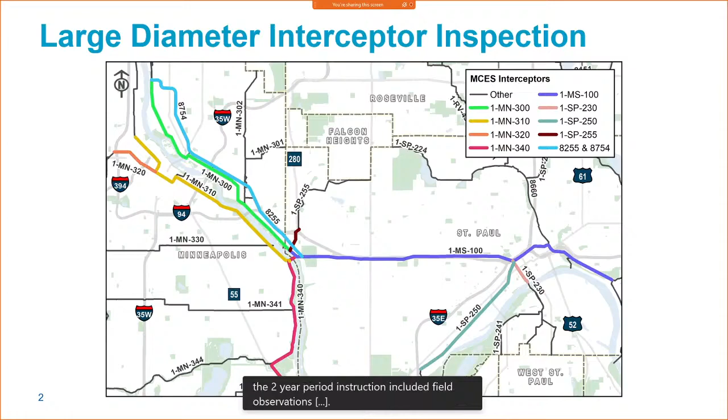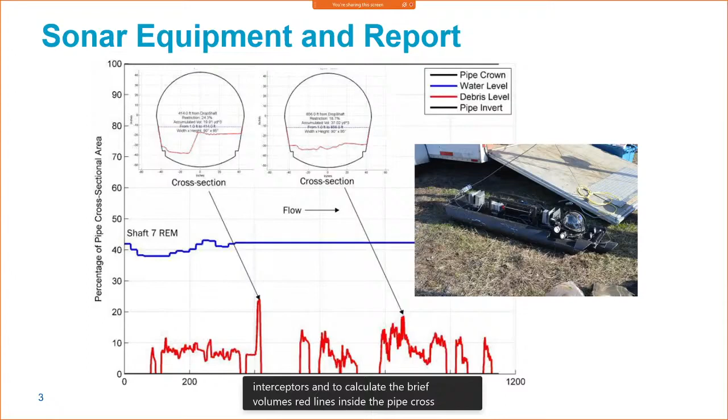The equipment platform floated down the interceptors to conduct the closed circuit televising and collect sonar data as shown on the right. Televising records were used to assess the conditions of the pipes. Sonar data was graphed to show debris depths and wastewater flow levels in the interceptors and to calculate debris volumes. The red lines inside the pipe cross sections on the graph show debris levels, and the blue lines show wastewater flow levels.

The pipe segments to be cleaned under the current contract are shown here. There are about 2.5 miles of pipe between 6 sites on 4 different interceptors.

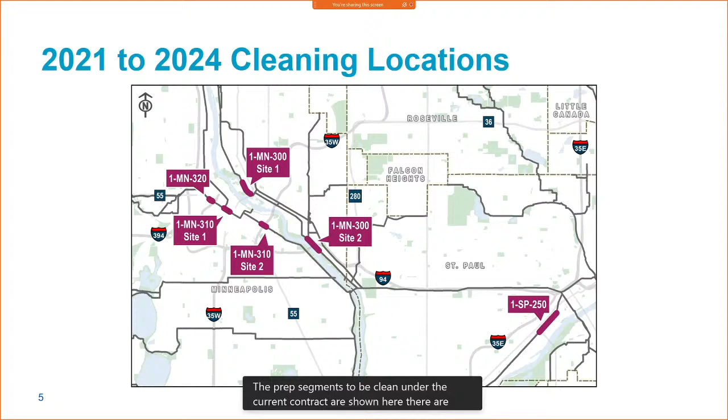The bid results were as follows. There were 2 contractors pre-qualified to bid. 1 pre-qualified bid was received, and Deutsch Environmental Services was the lowest responsible bidder.

The proposed action is that the Metropolitan Council authorize its regional administrator to award and execute a contract for Phase 2 large diameter interceptor cleaning, Project 819016, Contract 21P000, to Deutsch Environmental Services for cleaning 12,500 feet of interceptor pipe in an amount not to exceed $11,955,680.

Thank you, Mr. Chair. At this time, I can answer any questions. And if any questions come up later, my contact information is listed here.

Chair Lindstrom. Chair, you are actually muted, I believe. Yes, I am. I am muted. Sorry about that. Councilmember Zirin. Thank you, Chair Lindstrom.

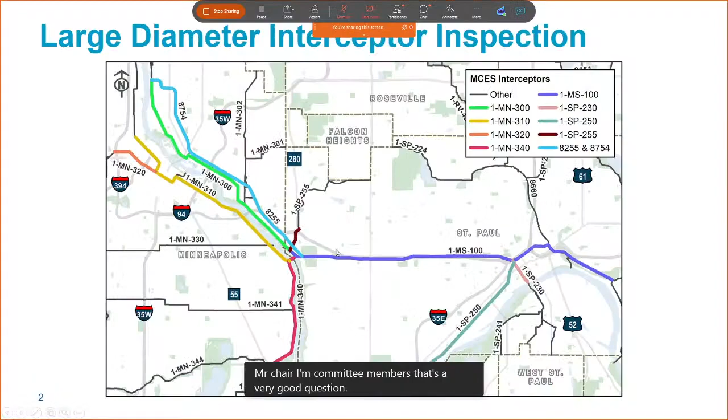Mr. Chair, committee members, that's a very good question. That's just an example of some of the stuff that's coming out of there. A lot of times there's broken castings, or there was a construction project that happened and things got washed down. There's stories of all kinds of large stuff going out. One of the troubles is you can't just pull that kind of thing out with a vacuum, so people do have to go in there and get that. I don't imagine a lot of that happens these days, but these pipes haven't been cleaned for some of them 100 years, so it is amazing what's in there.

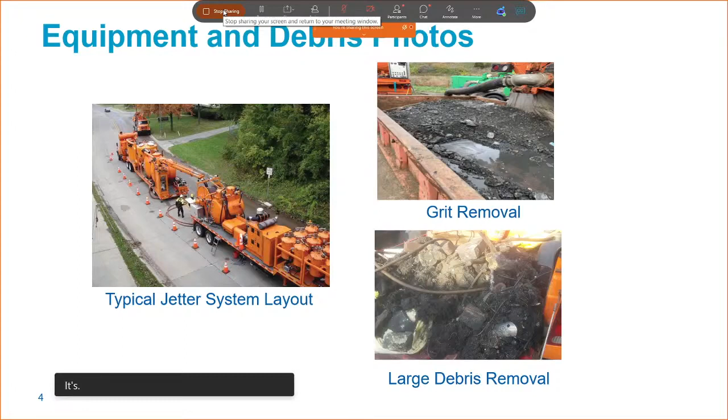You might find something from a crime scene from 1921. Very possibly. It's pretty fascinating that there's only 2 companies in the nation that do this type of work. I guess it's very specialized to climb down 110 feet in an active sewage tunnel or pipe and do this effectively, and have all the right equipment and know-how to make it happen.

Any other questions? Wolf moves, seeing none, approval. Thank you. Is there a second? Fredson will second. Roll call, please.

Fredson, aye. Sterner. Councilmember Sterner, you may need to vote in the chat. I will move on. Vento? Aye. Thank you, Councilmember Sterner. Wolf, aye. Zirin, aye. Lindstrom, aye. Thank you.

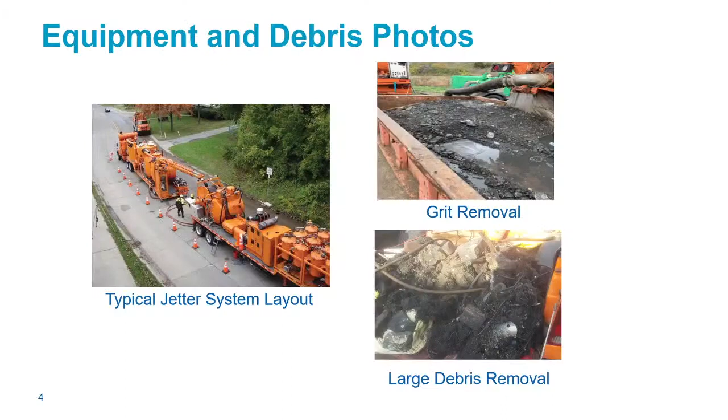Up next, we have acquisition of property for the Shakopee Interceptor odor improvements project. Thank you very much, Chair Lindstrom. Welcome, nice to be here. I want to present this business item tonight to discuss the acquisition of real property for Shakopee Interceptor odor improvements, project number 809510.

We have been in planning stages for the last year for an increase. What we've seen is an increase in odor complaints in the city of Shakopee, primarily due to new development starting to get closer and closer to our interceptor system. There are 2 areas in which we have observed odor issues. The first is at the end of a very long force main discharge from L57 that serves Chaska, and we get quite a bit of hydrogen sulfide generation from that force main, released right at the end of the green line.

There's a predominant east-west line shown in the graphic. The 9206-2 interceptor, shown in red, receives that flow, and we get quite a bit of release of hydrogen sulfide at that area. As the sewage flow moves across the city of Shakopee, it joins with interceptor 7120, which comes in from the south and heads north towards the Blue Lake Wastewater Treatment Plant. Right there, shown as odor area improvement number 2, is an area where we have basically 2 siphons, one that crosses a perennial stream and another that crosses the highway as the flow comes into the Blue Lake Wastewater Treatment Plant.

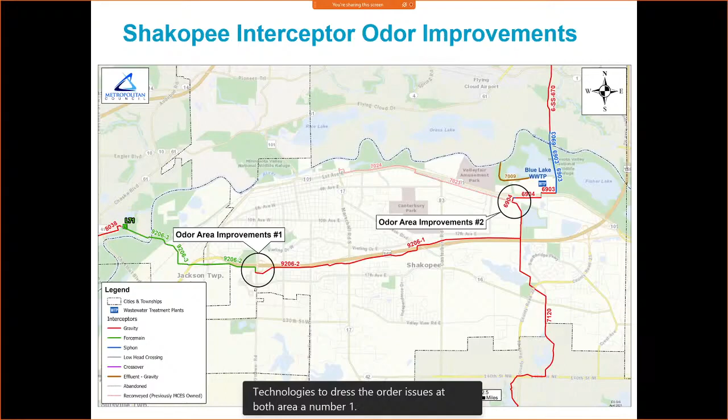Siphons are problematic in that they become an air dam to the air that's naturally ventilating down a sewer. So if you have an air dam, that air has to go somewhere, and it ends up being released right in that general location. So we've identified these two areas. We're heading into preliminary design, selecting technologies to address the odor issues at both area number 1 and area number 2. If we can go to the next slide.

At the location right ahead of the wastewater treatment plant, Blue Lake Wastewater Treatment Plant, we have a property at 6100 County Road 101 East. That is actually the location of one of the first siphons, that perennial stream I was talking about. This is about half a mile to the west of the wastewater treatment plant.

In 2017, we went through and had to replace pieces of pipe which were corroding, as well as replace the siphon structures that went underneath that perennial stream. We also did some lining of the interceptor to the west and to the east of there.

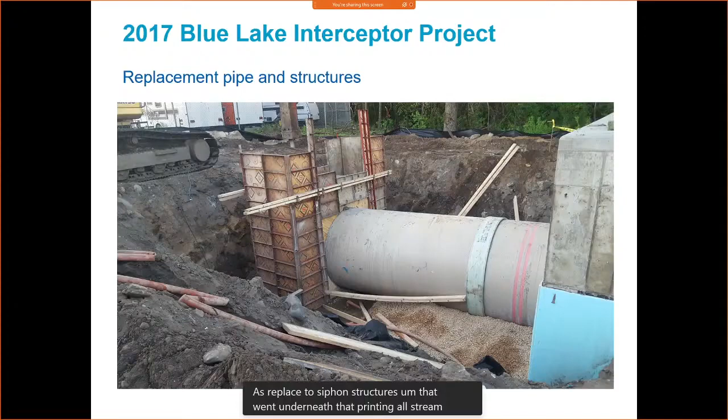If we go to the next picture, we'll actually see the siphons. We rebuilt the siphon that goes underneath the creek. I wanted to give you a little look at some of our construction pictures to see what our construction involves, at the property where the siphon is located.

Can I interrupt? I'm just curious, looking at this picture, what is actually the siphon?

The siphon is the 3 barrels. You see 2 of them have been constructed. They're constructed of ductile iron pipe, and they come out of the structure and duck down in grade and go under the creek. You don't see the creek really well in this picture because it's being pumped around through those 2 green pieces of PVC on the side.

You can see that's a little bit wet, it's always wet crossing a stream. Those pipes will actually come back up into another structure. We call that an inverted siphon - the flow will simply pass down and go underneath objects you can't cross or go through, like a stream or a highway, to get around those vertical features.

So, does that answer your question, Mr. Chair? Sure does. Thank you very much.

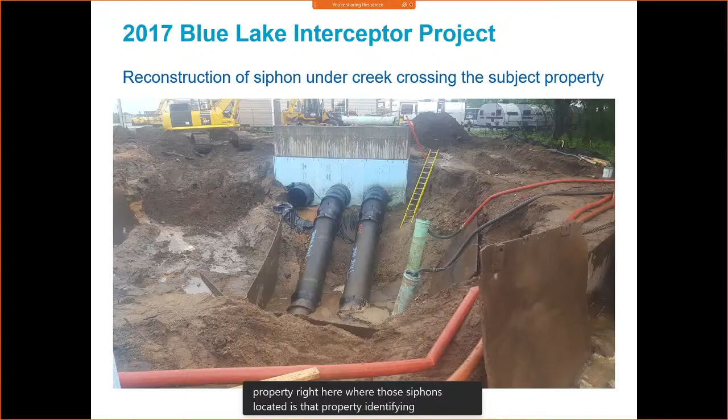At this very property where this siphon is located - is that property identified in the previous slide as 101 East, the 6100 County Road 101 East?

That property, we needed easements to do the work along there - the replacing of those pipe sections and the replacement of that siphon. So we acquired easements, temporary easements, through a condemnation. The condemnation is still outstanding on that piece of property.

So there was an interest in seeking to actually purchase the property, since it's not only ideal for us to locate new odor control facilities, but it would provide a final resolution to that condemnation.

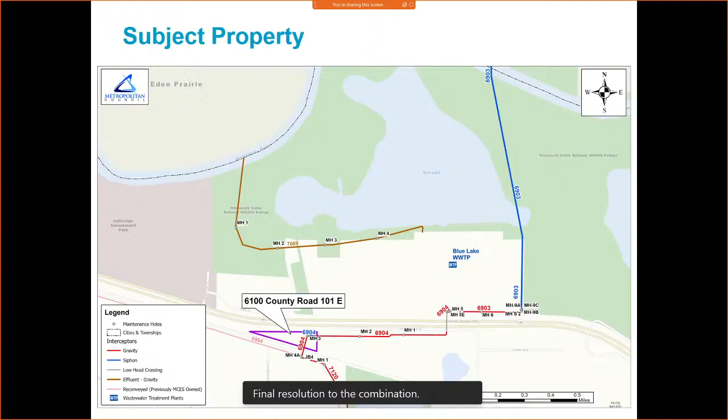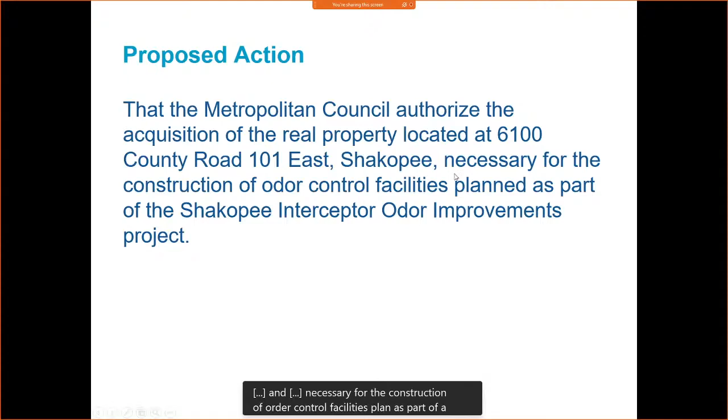With that, our proposed action is that the Metropolitan Council authorize the acquisition of the real property located at 6100 County Road 101 East in Shakopee, necessary for the construction of odor control facilities planned as part of the Shakopee Interceptor Odor Improvements Project. If you've got more questions, I'd be pleased to answer them.

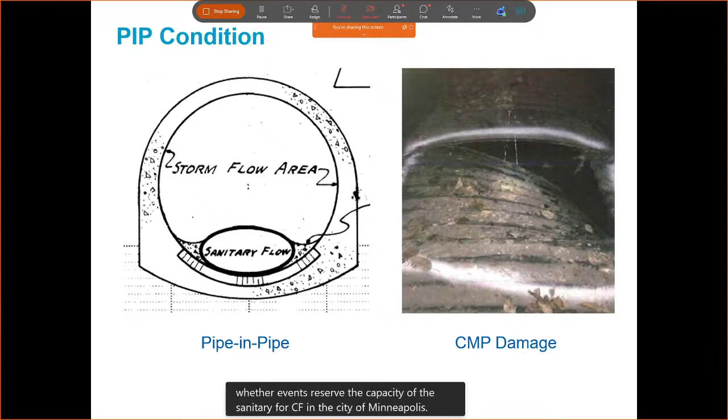Smoke testing of the corrugated metal pipe in November 2018 identified over 30 defects, including joint separations and holes. One of the more severely damaged areas of the pipe is shown on the right. The defects need repair to eliminate commingling of the storm and sanitary sewers during wet weather events and preserve the capacity of the sanitary sewer. MCES and the City of Minneapolis are currently conducting a joint study to address storm sewer capacity issues as well.

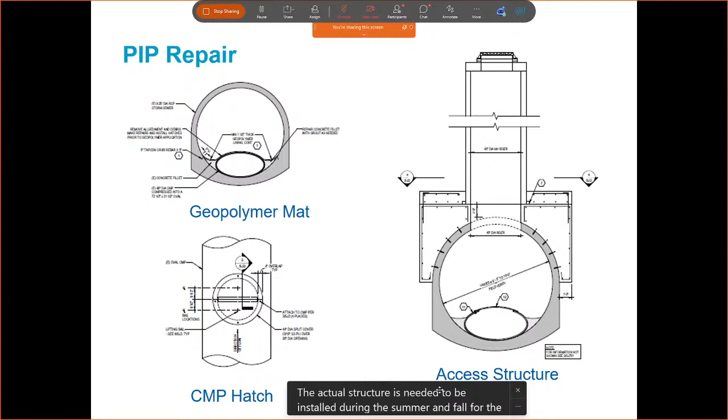There are 7 bids received, ranging from $6,508,850 to $11,195,893. PCI Roads was the lowest responsible bidder at $6,508,850.

The proposed action is that the Metropolitan Council authorize its regional administrator to award and execute a contract for Interceptor 1MN341 Pipe-in-Pipe Rehabilitation Project 807618, Contract 21P064, to PCI Roads LLC to install 13 maintenance holes and rehabilitate 8,200 feet of pipe-in-pipe interceptor in an amount not to exceed $6,508,850.

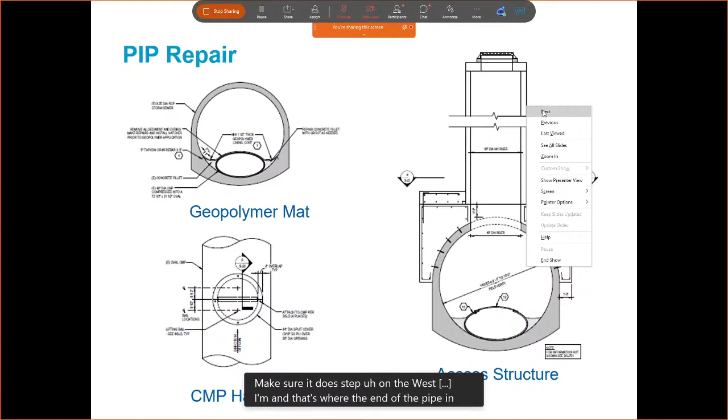No, it does, Mr. Chair. It does stop on the west side of Hiawatha, and that's where the end of the pipe-in-pipe installation is at. So everything upstream of that is just a straight sanitary sewer pipe. So yes, we're at 25th Avenue there.

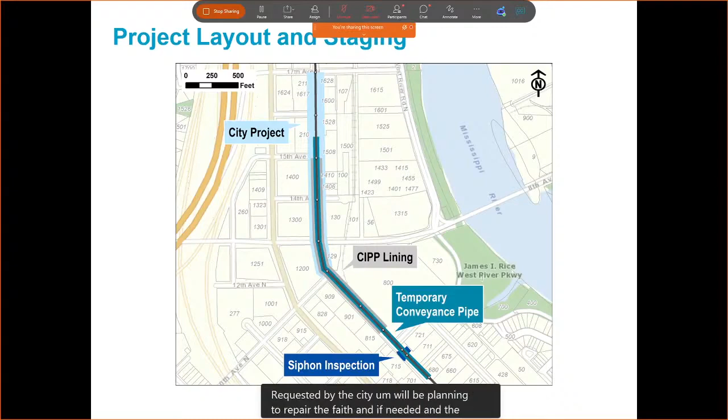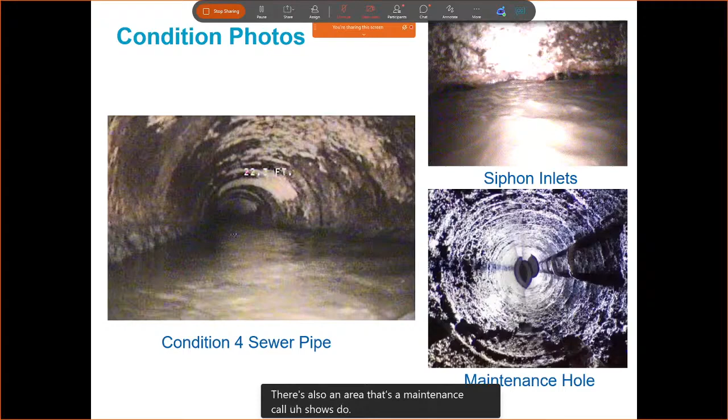These photos show the condition 4 deterioration in the sewer pipe on the left, and the siphon inlet structure on the top right, where you can see just the top of the gratings of the pipe. So, like going back to Adam's photos where they had the pipe going down into the ground, that's exactly what we've got here. The box fills up to the top of those pipes and then pushes it down to the next structure, so that needs to be dewatered for inspection. On the bottom right is also a maintenance hole that shows deterioration. A lot of those are brick and the mortar's missing on them.

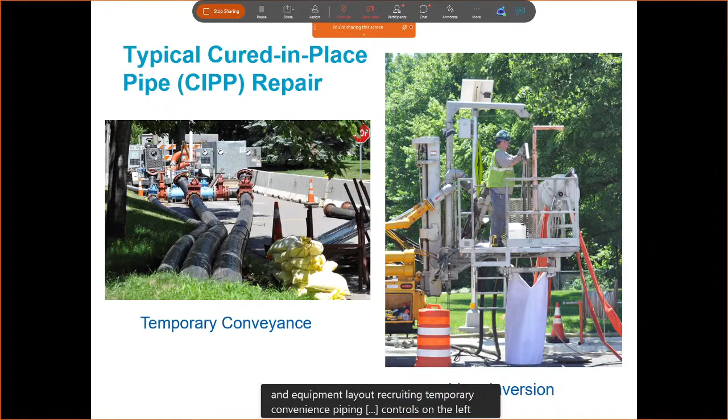These photos show typical cured-in-place pipe lining construction areas and equipment layouts, including temporary conveyance piping, pumps, and traffic controls on the left, and installation of the lining before curing on the right.

5 bids ranging from $2,706,093 to $4,134,157 were received. Michels Corporation was the lowest responsible bidder at $2,706,093. The engineer's estimate of $1,806,834 was 34% lower than the lowest bid due to an underestimation of temporary conveyance costs, which increased when the conveyance pipe was shifted from the west to the east side of 2nd Street and buried under cross streets and driveways to minimize traffic impacts, and also underestimation of CIPP lining costs, which recently spiked as a result of shortages caused by the ice storm in Texas, where most of the materials are manufactured.

The proposed action is that the Metropolitan Council authorize the regional administrator to award and execute a contract for Interceptor 1 MN 310 rehabilitation from 15th to 8th Avenue North, Project 807667, Contract 21P007, to Michels Corporation for the rehabilitation of 1,850 feet of interceptor and 5 maintenance holes in an amount not to exceed $2,706,093.

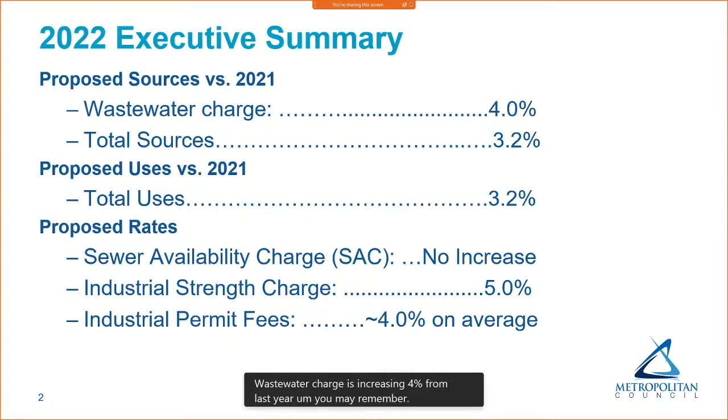Jumping right into the executive summary, the most important things to know: for our proposed sources for 2022, our wastewater charge is increasing 4% from last year. You may remember in 2021 we only increased our rate 2% in anticipation of fiscal complications from the pandemic. Most cities are pretty healthy and have not experienced the loss that was expected, so we feel confident in that 4%. And just as a reminder, no city will actually see exactly 4%.

There are 2 determinants to a city's increase. One is what we're doing with the overall budget, but the second is their flow from 2020. We use the prior year's flow as an allocation benchmark. So if a city had 10% of the flow in 2020, then they will pay 10% of our total MWC for 2022. The cities generally appreciate that because they get budget certainty. It's no different though there is some volatility in there, but no different than if you were doing it real time. If you had a wet year and all of a sudden your flows went up, if we were doing it on a per gallon basis, you would experience that same volatility in the year. This allows them to plan for it.

We sent the proposed rates out in early May, and so most cities have seen them and are starting to build their 2022 budgets. So they are aware of the changes that we are proposing. Our total sources is going to increase 3.2%. Sources includes the wastewater charge, SAC, industrial waste fees, and also some of our interest, and I'll talk through some changes we're seeing there.

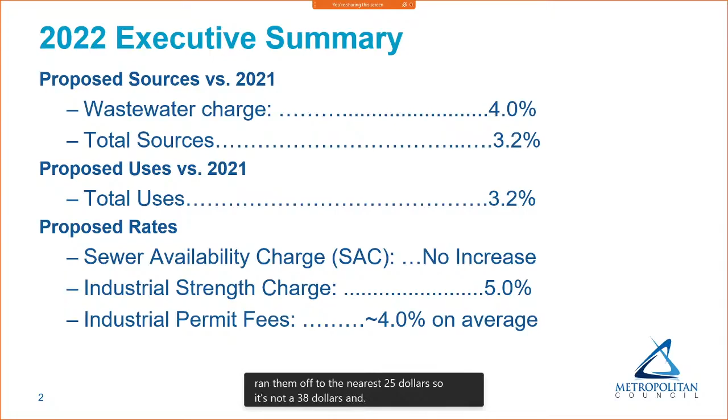Our industrial permit fees by policy are pegged to our wastewater charge, so if the wastewater charge goes up 4%, industrial permit fees go up by 4%. There is a tilde because we round them off to the nearest $25, so it's not $38.14, just to keep the math simple. So those are the high level. Next slide, please.

As we get into our revenue sources, I do want to remind everyone that we are a fee-for-service agency. I like to say you flush, you pay, you don't flush, you don't pay. We do not collect any property taxes, we do not take any state dollars, nor do we take in any federal dollars, with the exception of an occasional pass-through grant. But for actually running and operating our system, we are 100% dependent on the fees that we collect from our 110 customer communities, as well as our industrial customers.

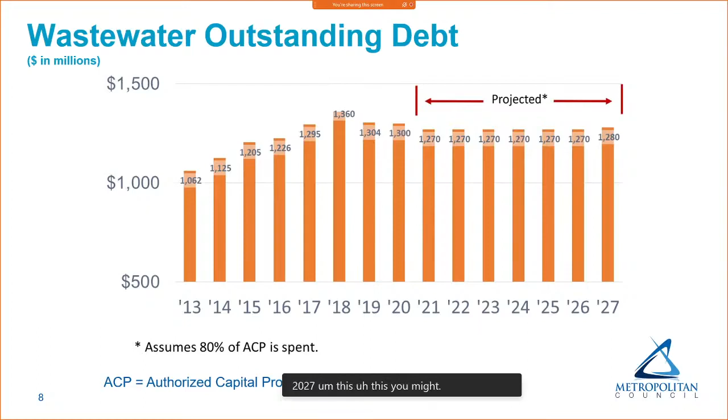Overall, that gives us another good picture. Back in 2018, our total outstanding debt peaked at $1.36 billion, and that's coming down to below $1.3 billion—around $1,270 million for the next couple of years, with a slight bump up in 2027. You might ask, what does that mean? Is that a lot?

So when there's a heavy rain event, all that rainwater goes to their plants, and the plants can't handle it—it's called a combined sewer overflow, where they release untreated water into the receiving body. Because in the 80s our municipal partners took the bold, future-looking step of separating storm from sanitary sewers, we don't have those issues nearly to that extent. We do get a little inflow from leaky pipes in our system and the municipal system, which is why we have an inflow and infiltration program to reduce that. We've seen massive improvements.

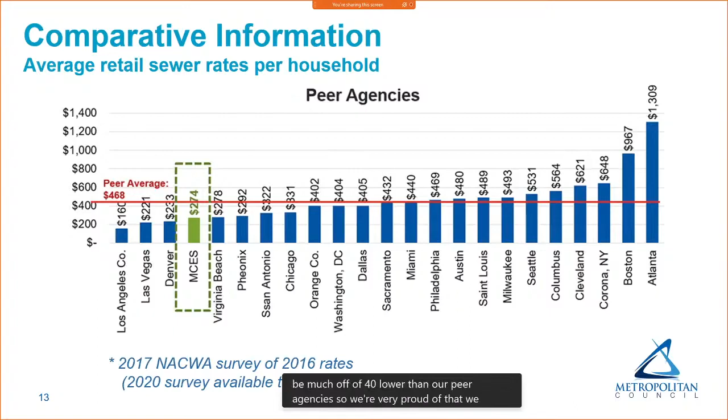So what's our long-term perspective? Just a reminder of where we've been. We set a 5-year promise back in 2018 to keep our rates at 4% or lower. For 2018 through 2020, we have honored that. In 2021, we actually dropped it even lower to 2%, which was a bit of a challenge, but we made it. And now in 2022, we're going to go back up to 4%.

Our long-term goal after that, we're going to have to monitor what happens with the pandemic and its impacts. If the recovery is not as strong as it has been, we'll need to adjust to that and partner with our cities to charge a rate that's appropriate. But in the long term, we do want to stay less than or equal to our wastewater inflation rate. Wastewater inflation rate is not necessarily a specific index you can look up on the Bureau of Labor and Statistics, but what we want to do is look at the costs that impact us—what's fuel doing, what's labor doing, what are chemicals doing, what are utilities doing—and we will match our increase to that.

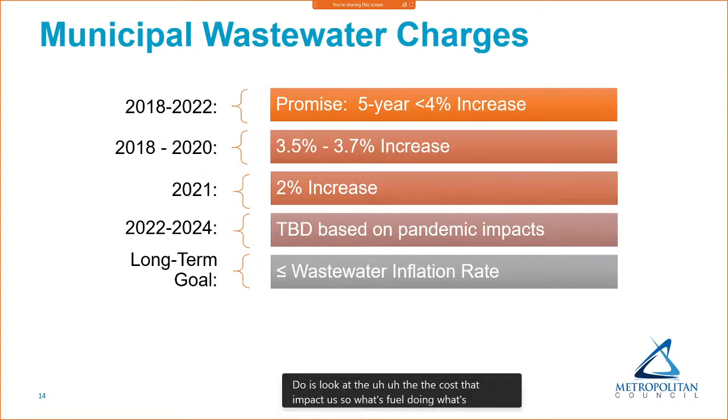The load charges are staying flat, and that's because we've removed what we used to charge for interceptors as part of that, because the loads were dropping off at remote sites and traveling through an interceptor. We no longer receive through our interceptors except for one at the Fridley site. So we now receive most of our waste, load waste at the plants themselves, which don't have an interceptor component.

So we are phasing out the charging of that interceptor component, and that's why those are flat. The permit fee we talked through earlier, that's pegged to our MWC, and then the general permit fee, that's $100 to $500. If we increase that, it would cost us more to reprint the postcards than it would to actually collect the additional revenue. So we leave that flat to last year.